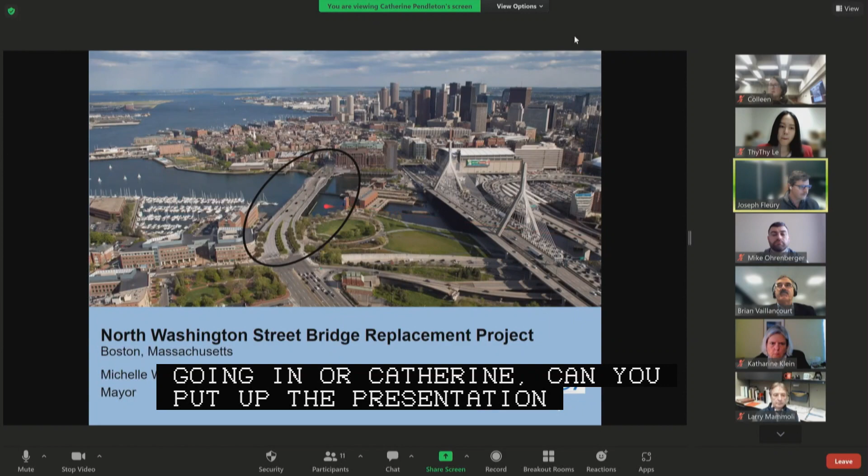Colleen or Catherine, can you put up the presentation? Here's an aerial view of the new bridge. Can you go to the next slide? Here's an aerial of where we're at today.

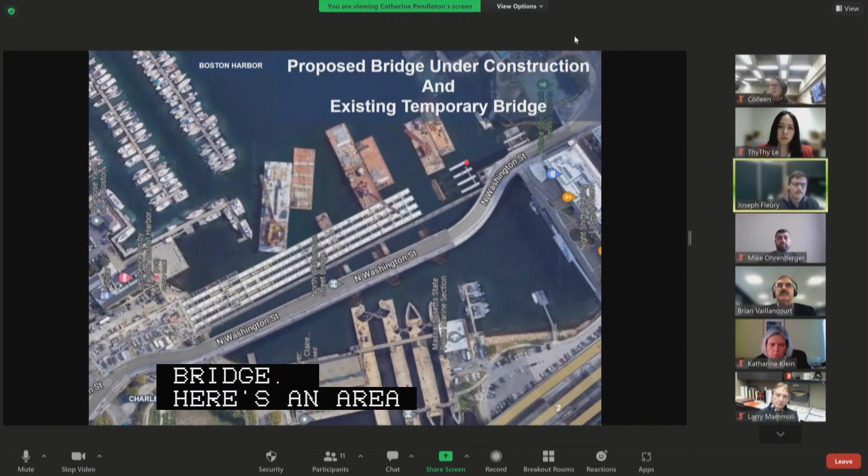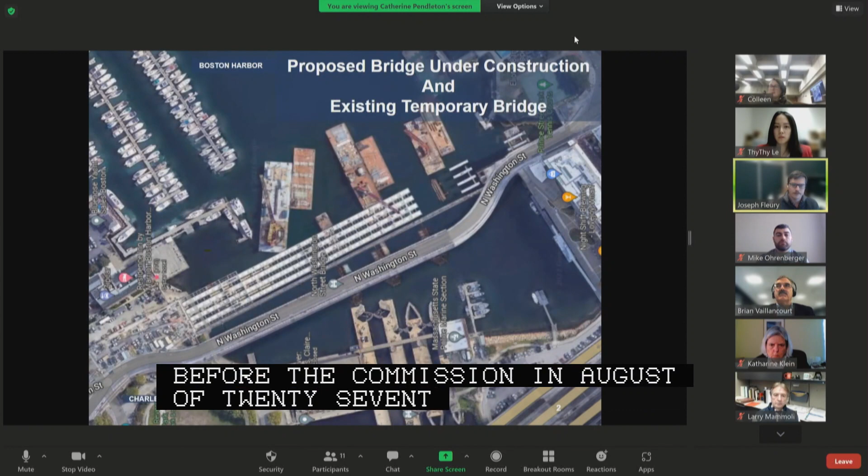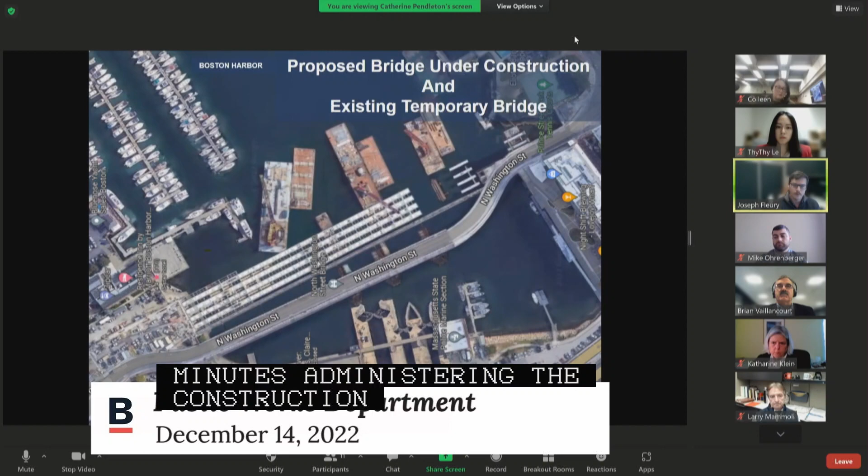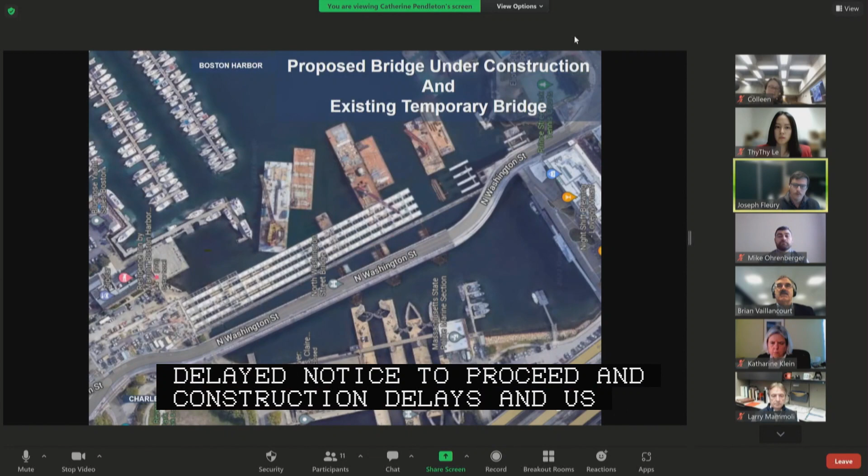Just a little background: Boston Public Works was before the Commission in August 2017 to obtain the original temporary construction easements, and last month to reobtain easements at 2 other properties. We had originally obtained 5-year easements with an expected 4-year construction duration, starting August 2017. The notice to proceed from the state DOT, who is administering construction, was given to the contractor a year later, in August 2018. This delayed notice to proceed and subsequent construction delays have required us to come back before PFC to obtain these new easements at 4 privately owned parcels — 2 property owners today and the 2 from last month's meeting. Next slide, please.

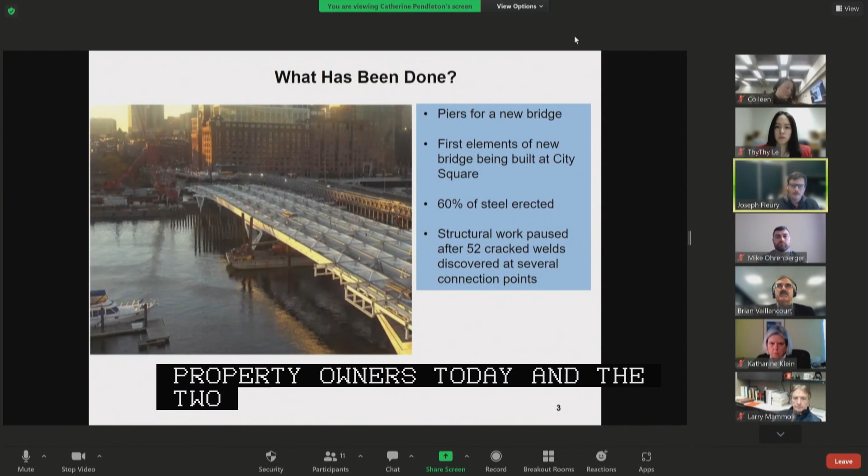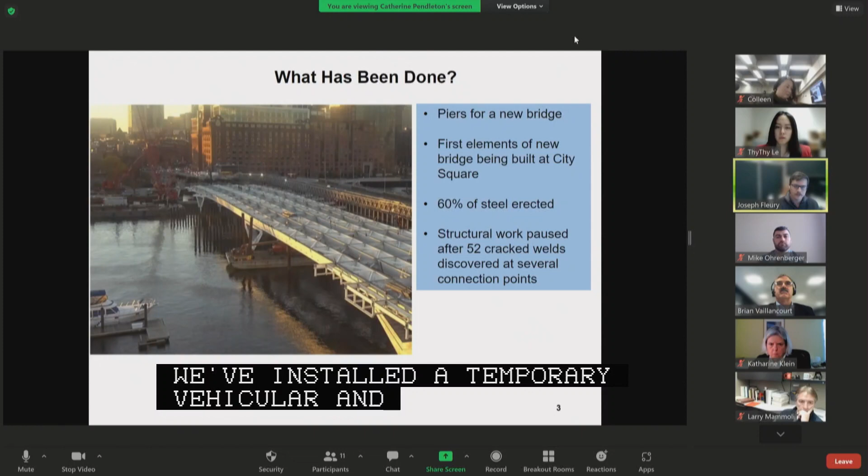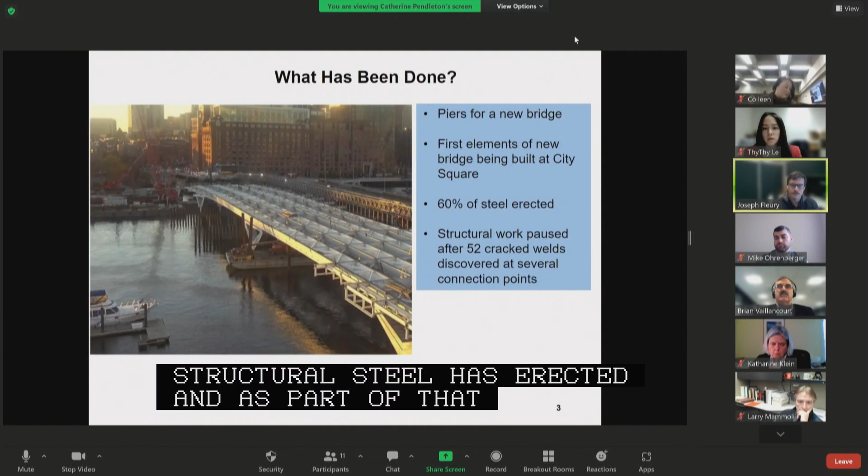So, a little bit of work that's been done to date: we've installed a temporary vehicular and pedestrian bridge on the west, Charles River side of the old structure. We demolished most of the old structure, including the piers, and completed new construction in the water, including deep foundations and piers. 60% of the new structural steel has been erected. As part of that steel inspection, the state found 52 cracks in the vertical welds between the steel members.

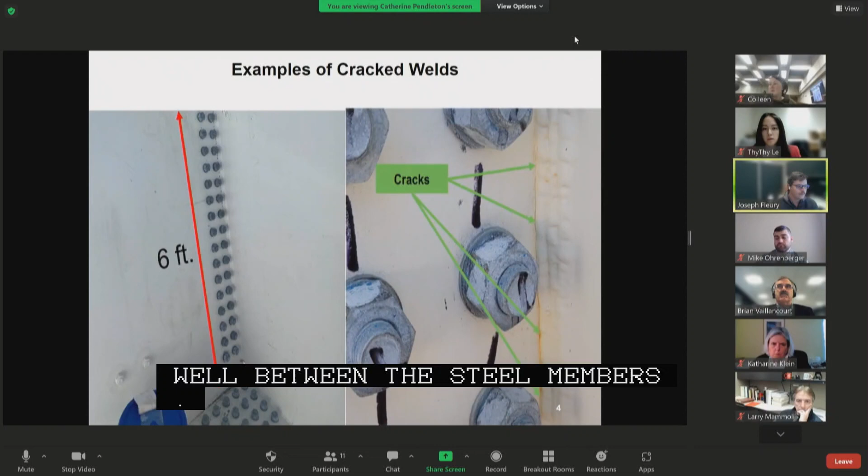Next slide, please. This is just showing a couple of photos of those cracks in the steel that were found in October 2021 by MassDOT. Next slide, please.

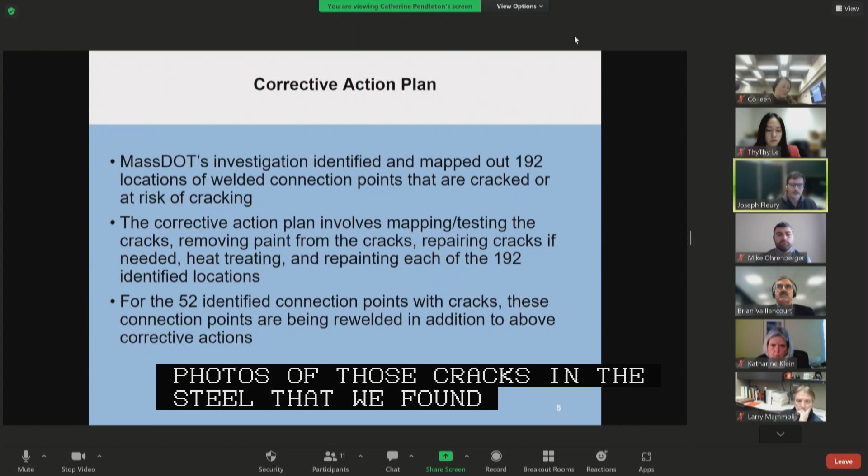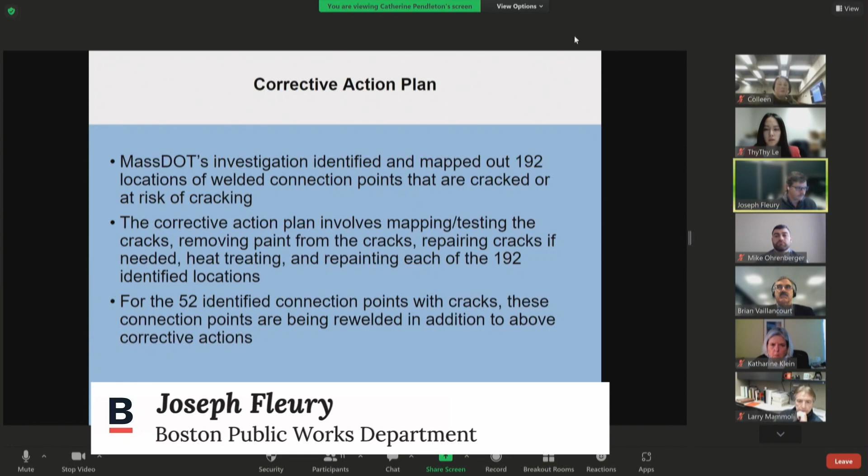So this is a bit about the corrective action plan we discussed last month. MassDOT, in coordination with the city and the contractor, developed this plan to address the cracks and ensure the bridge performs well through its full intended service life. I won't get into all the info here, but I'm happy to answer any questions afterwards. Next slide, please. The contractor is actively working on this corrective action plan with the intent of completing all the work described in it later this month into early next month, in January.

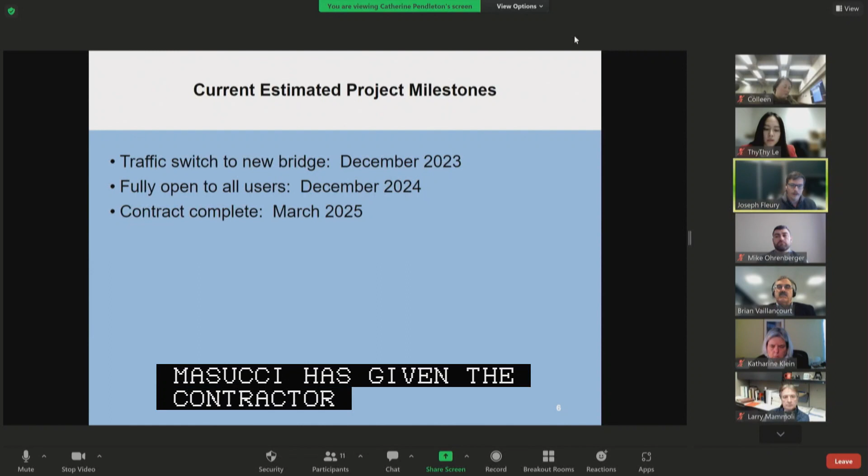Since the hearing last month, MassDOT has given the contractor permission to restart regular contract work, in addition to working towards completing this corrective action.

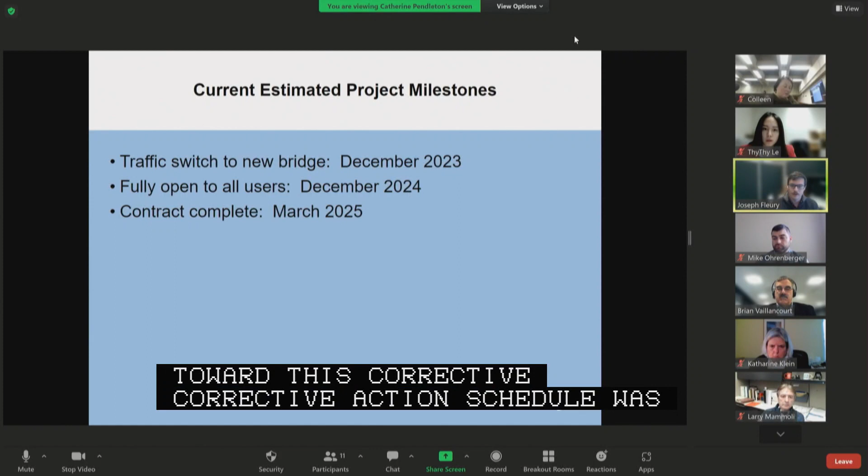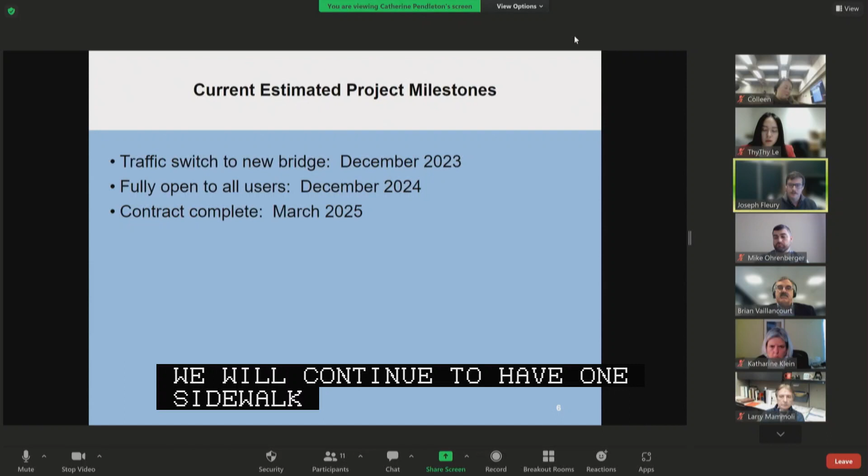Schedule-wise, traffic is currently scheduled to switch to the new bridge in December of next year. We will continue to have one sidewalk, now flipped to the harbor side, and continue to have 3 lanes of vehicular traffic. This will allow us to complete work where the temporary bridge currently lands on the north end side of the river.

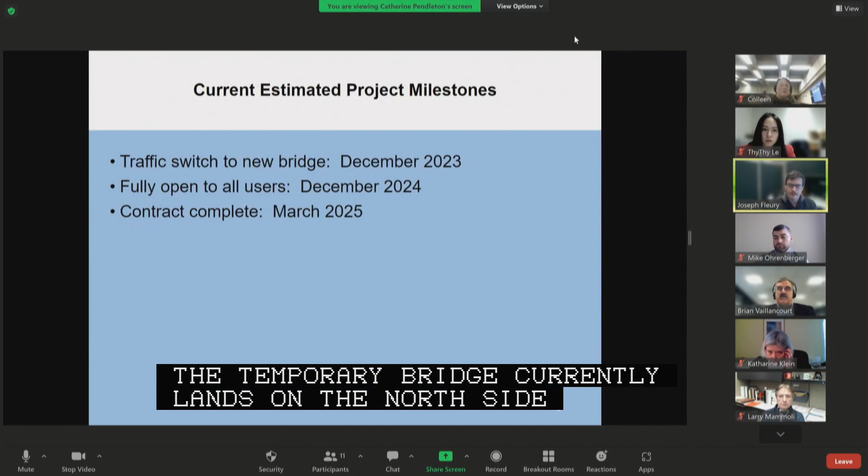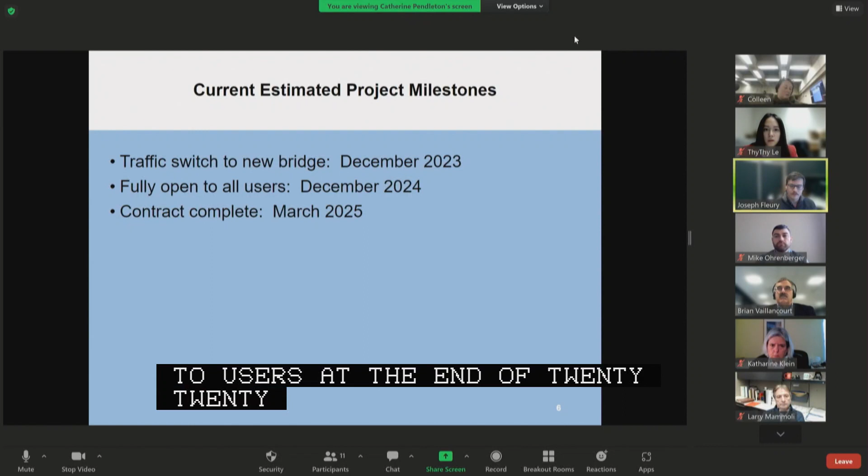There will be some in-water work, demolition, foundations, and some final tie-ins. The bridge should be fully open to users at the end of 2024, with the contract complete, punch list items, and landscaping in early spring 2025, and turned back over to the city.

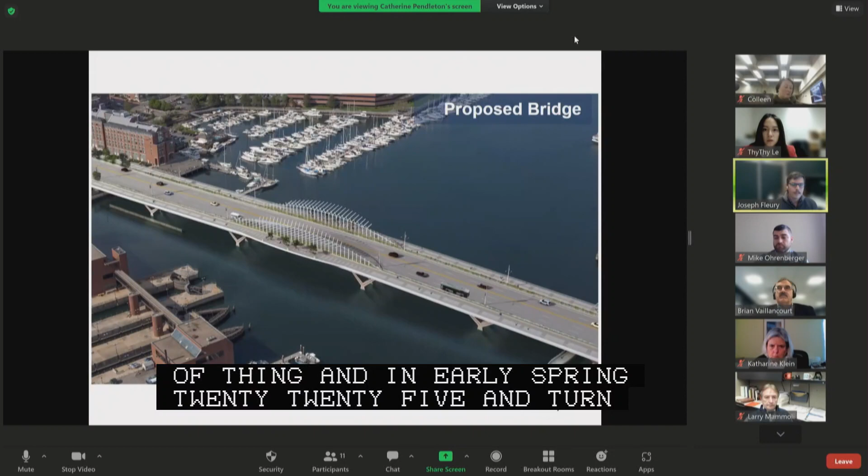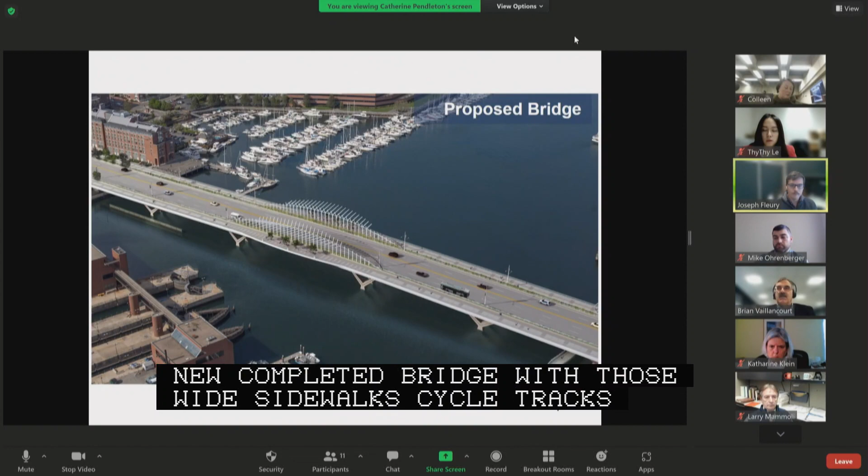Next slide, please. Here's just a rendering of the new completed bridge with those wide sidewalks, cycle tracks, bus lane, and 4 general use traffic lanes. With that, I'll turn it over to Brian Vaillancourt with AECOM to walk through the easements themselves.

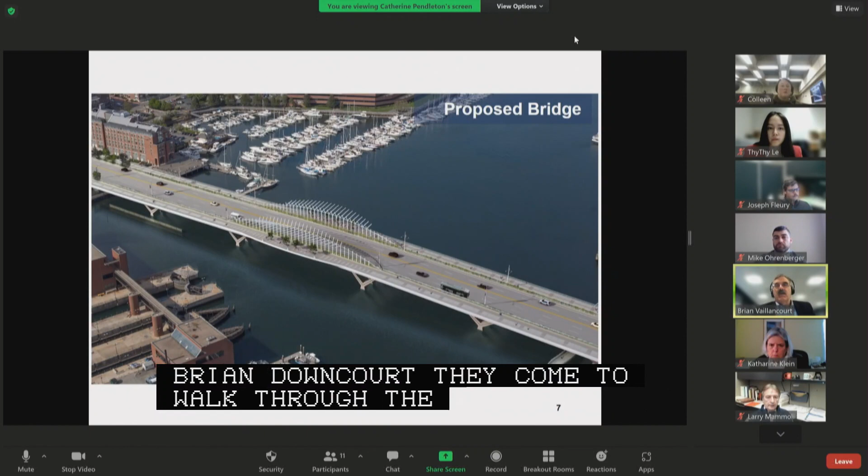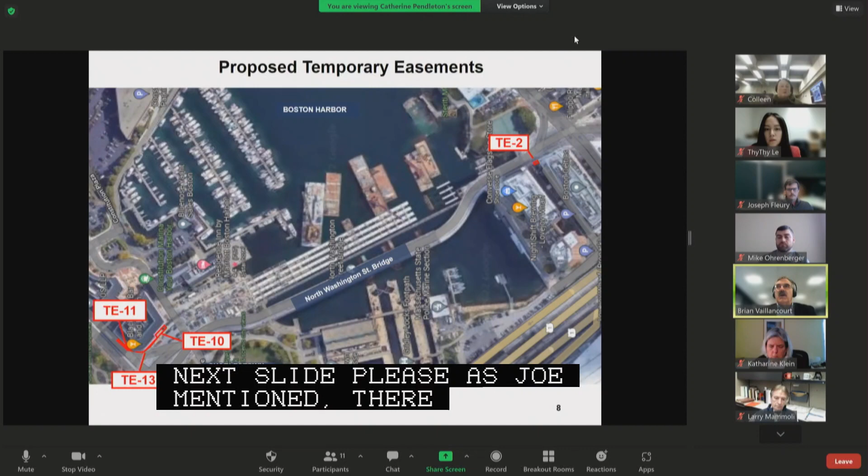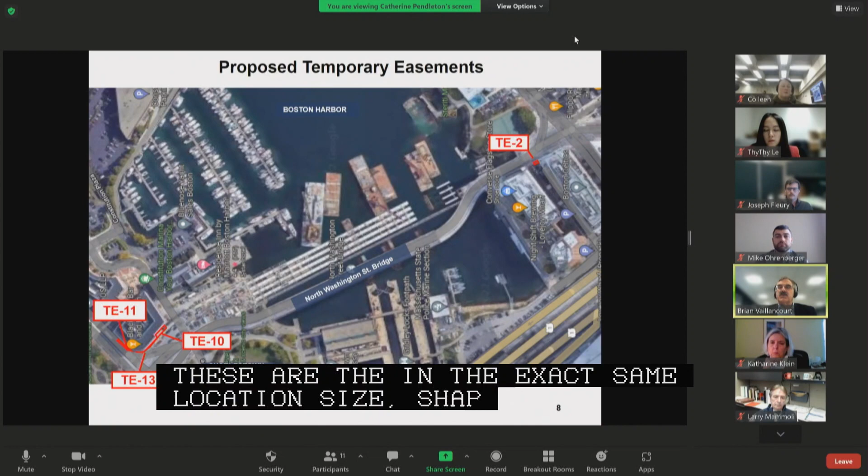Thank you, Joe, and good morning, commissioners. As Joe mentioned, there are 4 temporary construction easements associated with 2 privately owned parcels, and these are in the exact same location, size, shape, and intended use for the purposes of the easements, as was presented before the commission back in 2017.

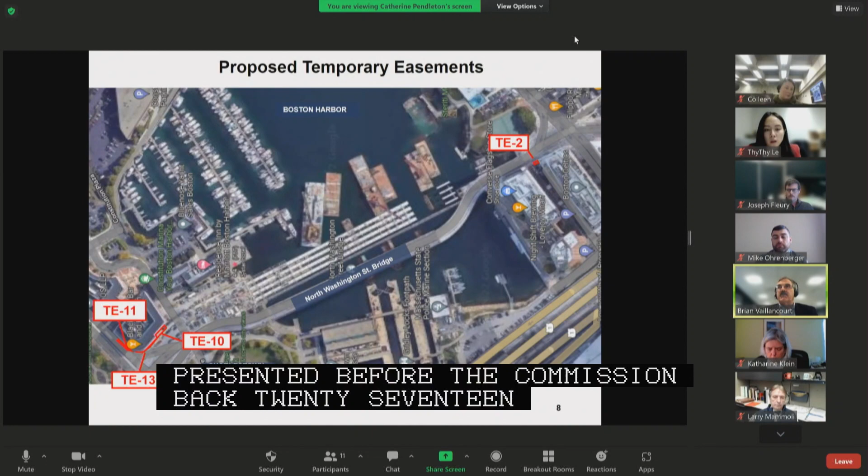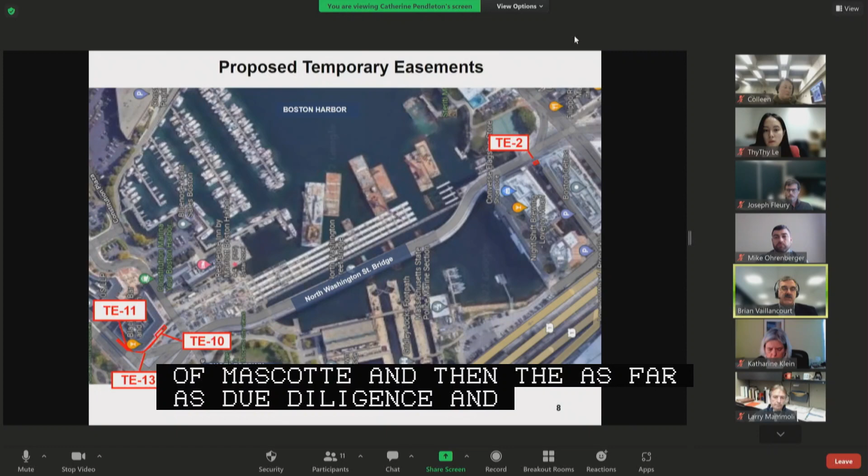The easement term is for 5 years, at the request of MassDOT. As far as due diligence and the process we've employed, it's fully FHWA compliant under the Uniform Act of 1970. We're also fully compliant with Massachusetts General Law 79 and the PFC's Enabling Act.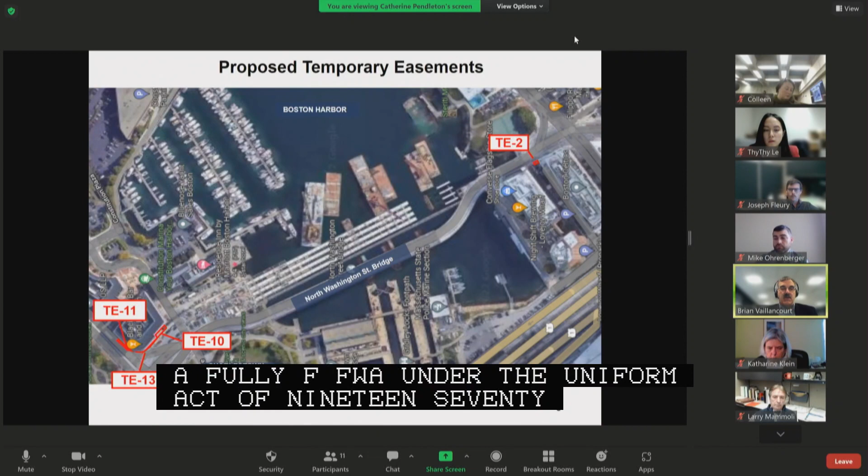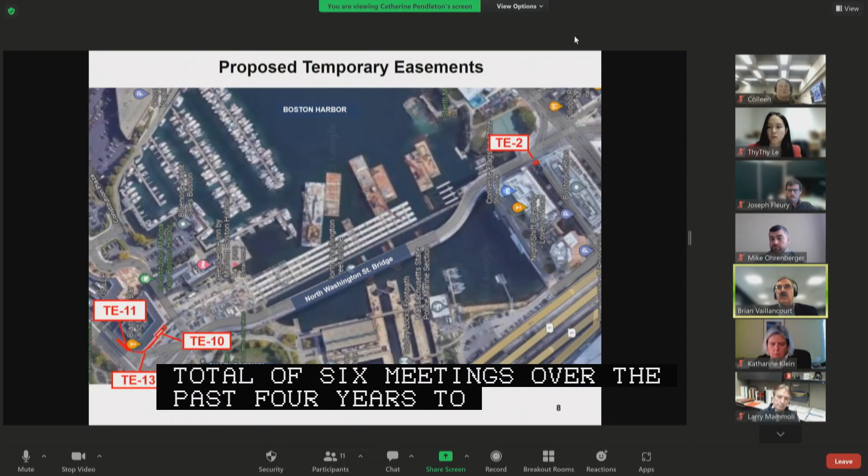During the course of construction, the city held a total of 6 meetings over the past 4 years to keep the public informed, ranging from on-site gatherings before the pandemic to virtual public meetings during the pandemic. Then in October of this year, 2 more public meetings were held to update the public on the status of current construction and what's planned going forward.

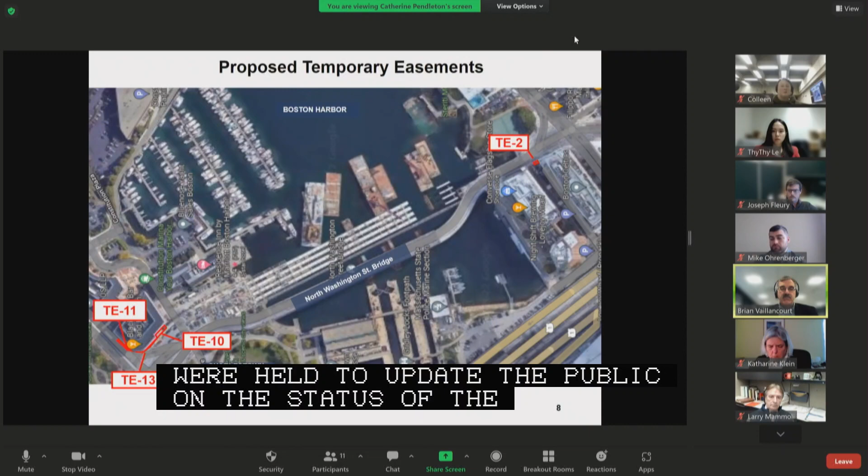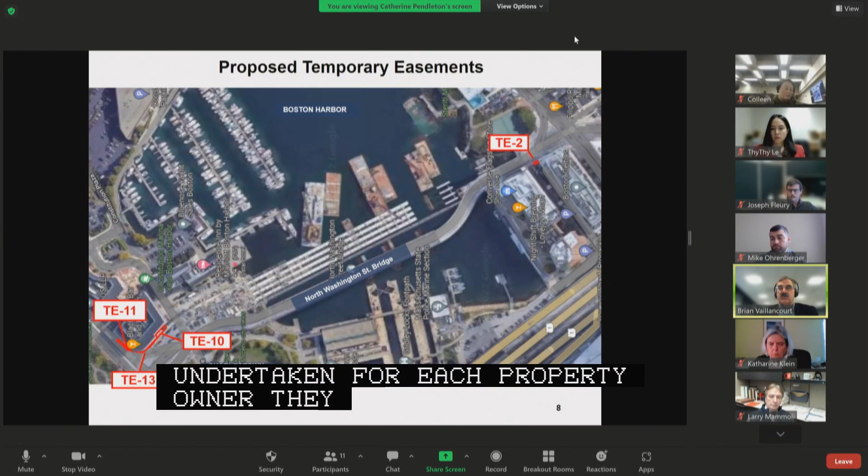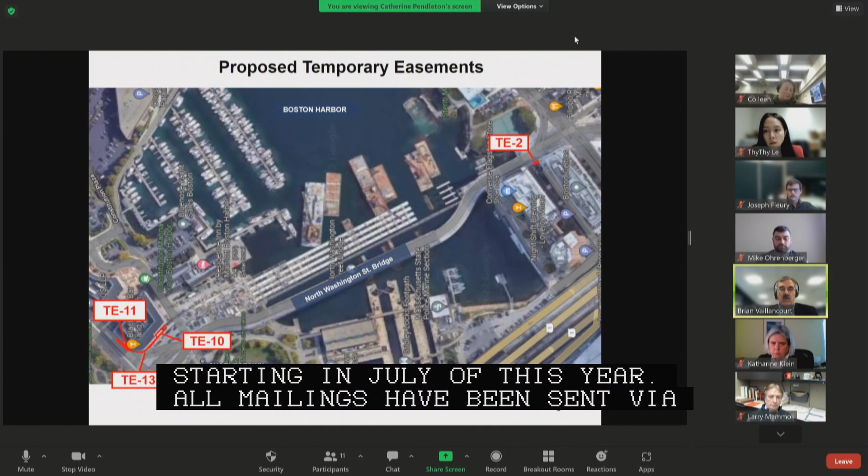The outreach undertaken for each property owner involved contact by mail, in person, or via email starting in July of this year. All mailings have been sent via certified mail, and the right-of-way team has made at least 3 contacts with each property owner, either in person, over the phone, or via email, and in many cases more than 3 contacts.

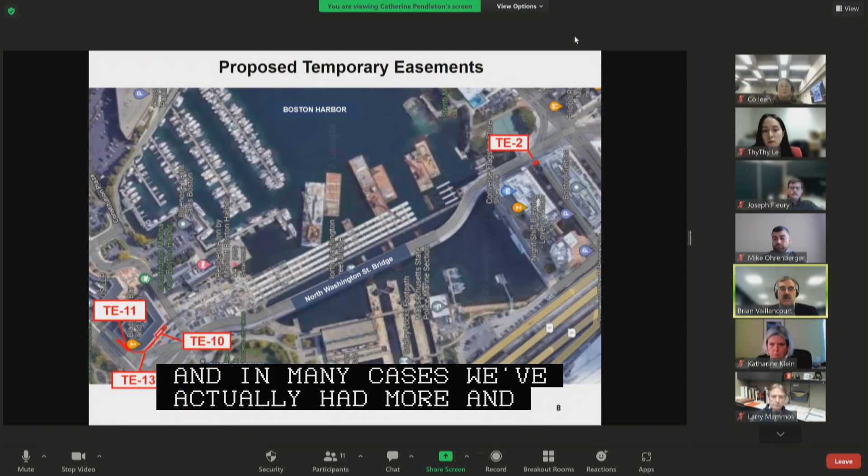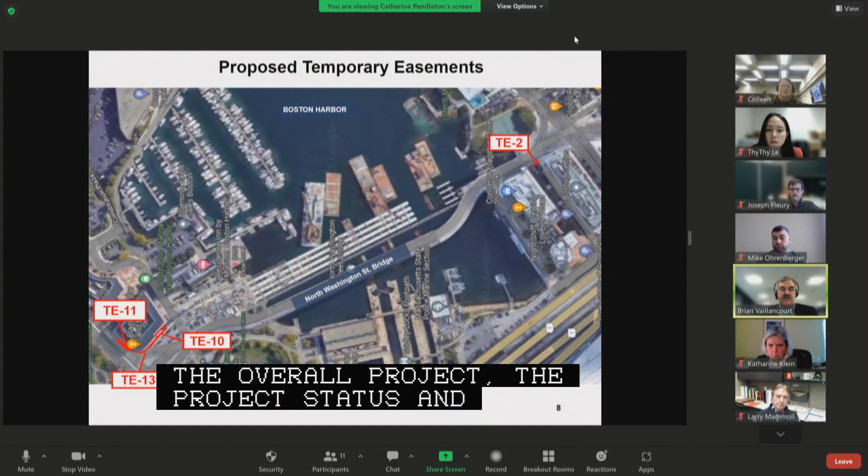We've discussed with them the easement process, their rights, the overall project, the project status, and the nature of the work in the temporary easement areas, the purpose and location of the temporary easements, and likely construction duration, coordination, and access coordination.

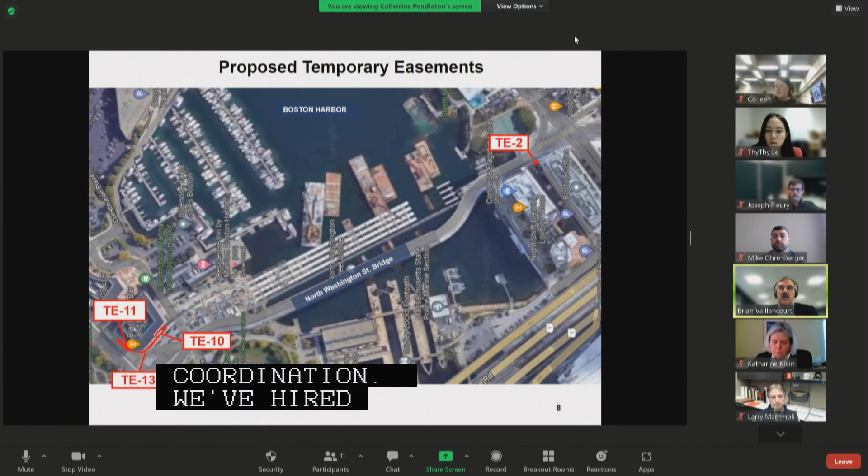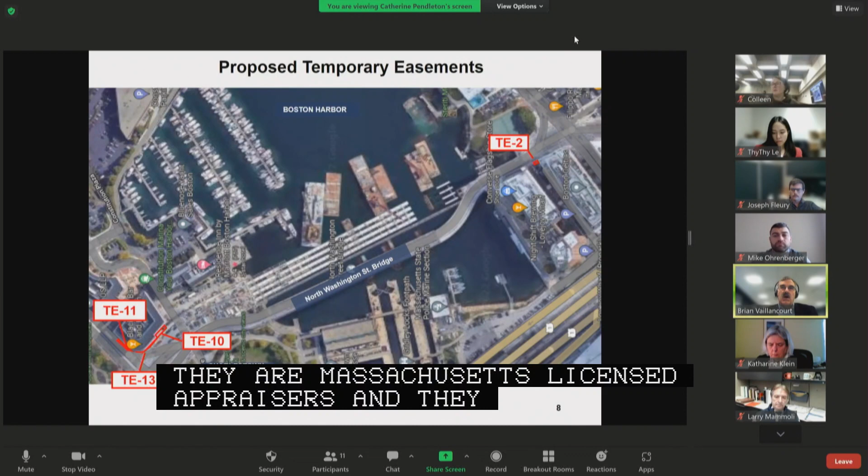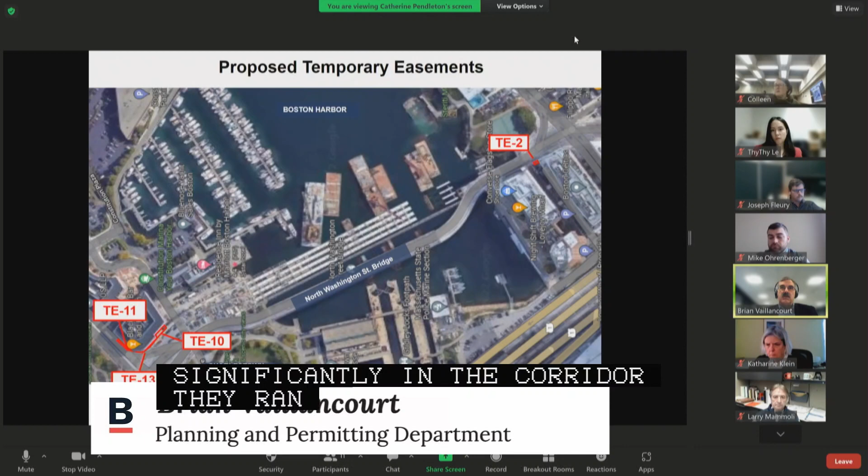We've hired 2 appraisers to conduct the appraisals. They are Massachusetts licensed appraisers, and in the course of conducting the appraisals, they note that property values have increased significantly in the corridor, ranging from approximately $100 per square foot back in 2017 to $260 per square foot in 2022 on the left-hand side, or north side, of the river, and up to $270 per square foot on the right-hand side.

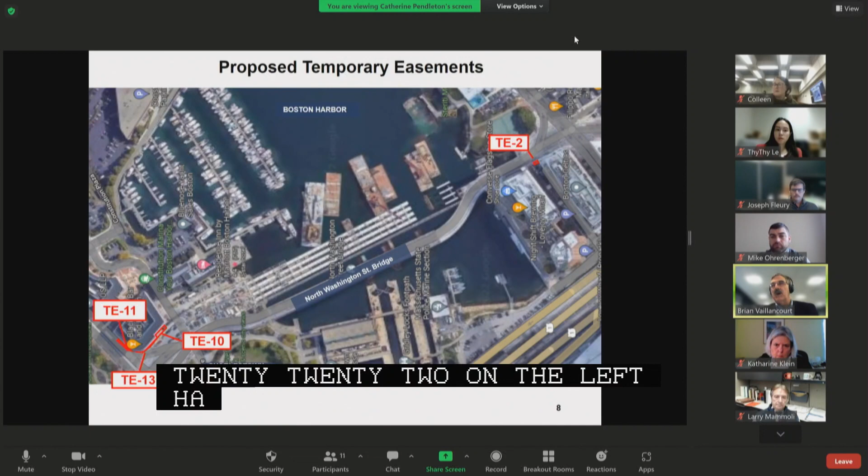As in 2017, these easements are non-exclusive. If we go to the next slide, I'll review the individual easements with you.

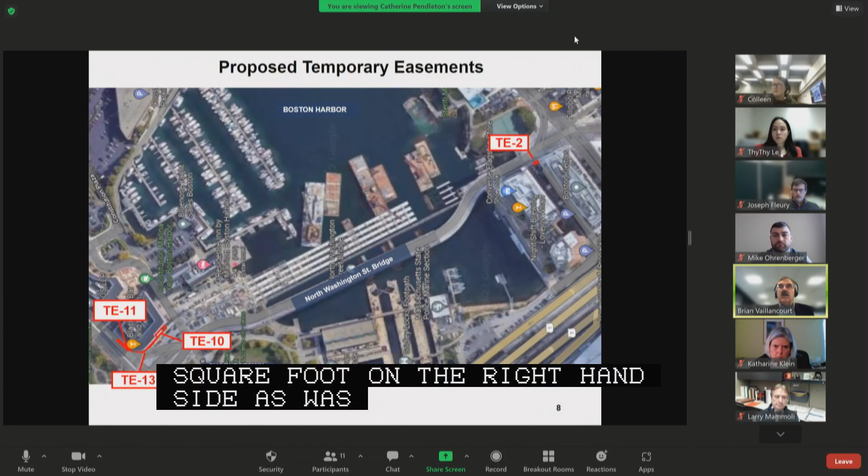The first easement is TE2, a temporary construction easement for bridge wing wall modifications. It's located at 226 to 234 Causeway Street, and it's approximately 251 square feet in size. This easement was originally valued at $10,200 in 2017, and due to the increase in property values and resulting appraisals, it's now valued at $26,100.

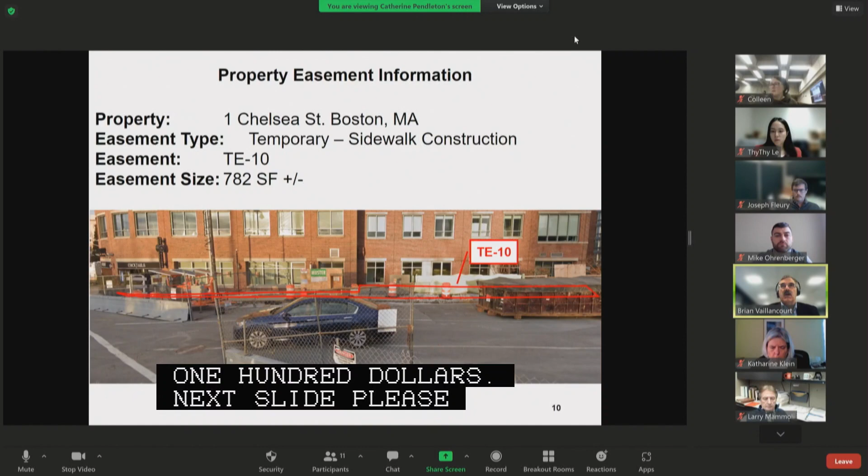Next slide, please. There are 3 easements, and we'll proceed from right to left across the building face. The next easement is TE10 at 1 Chelsea Street. It's 782 square feet, and it's for sidewalk construction, so the sidewalk can be brought back right up to the front face of the building.

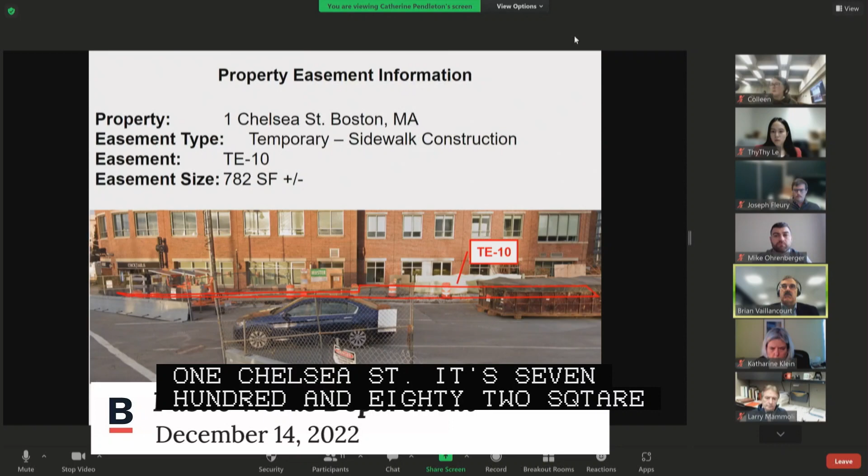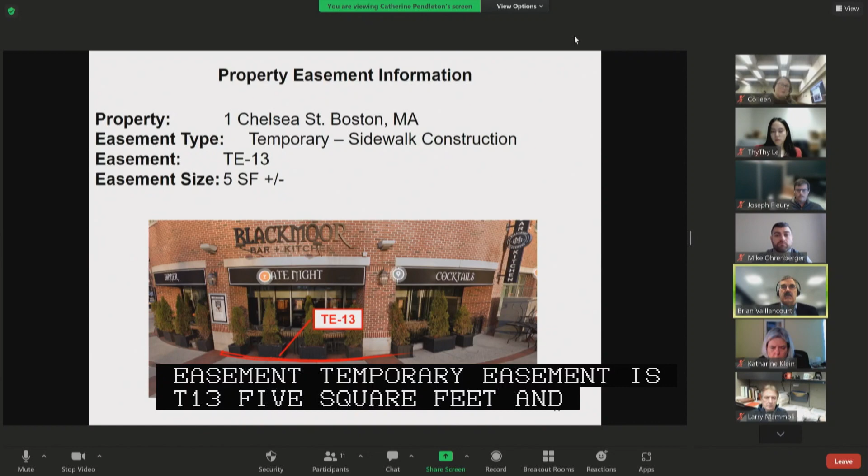Next slide, please. Proceeding along the face of the building, the next temporary easement is TE13, of 5 square feet. Once again, it's so that sidewalk construction can carry right up to match the front face of the building and match all the decorative concrete and sidewalk that they have there.

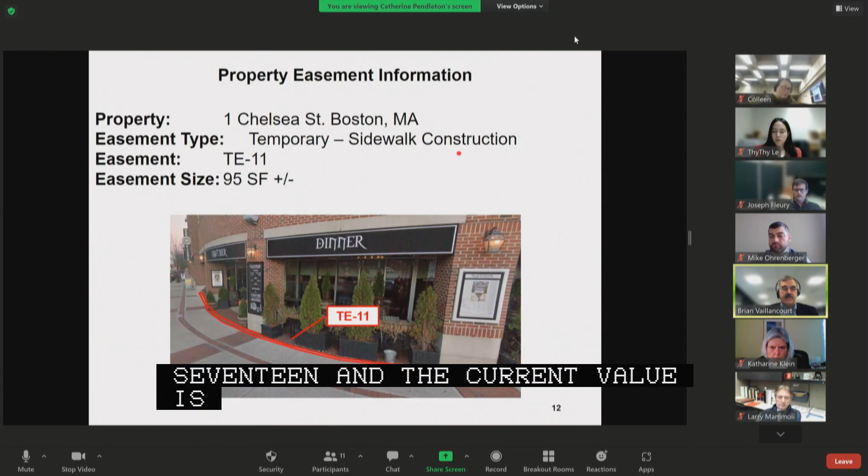Next slide, please. The last easement is TE-11, which wraps around the building face, and that's 95 square feet, and once again is for sidewalk construction. The value of these 3 easements at this property was $35,000 in 2017, and the current value is $86,200 in 2020. This concludes this portion of the presentation, and we're here to answer any questions that you may have.

Thank you, Brian. Any questions, Commissioner Mammoli? Sorry, Larry, can you unmute yourself? Unable to hear.

Sorry about that. Motion to approve. Second. All in favor? Aye. Thank you, the ayes have it. Vote number 1 is hereby approved.